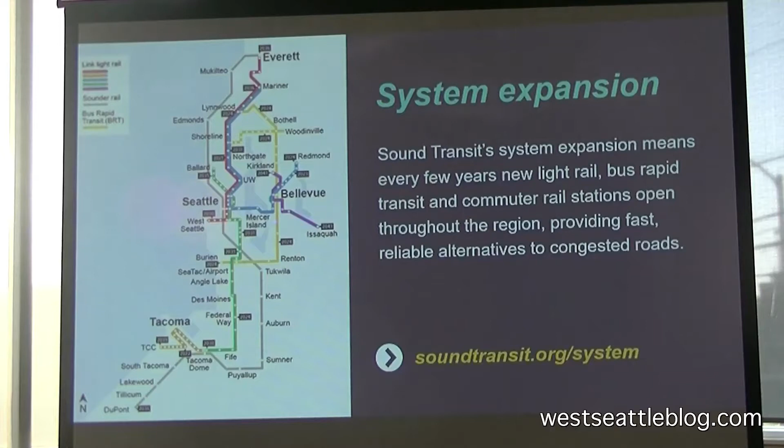It is part of a broader system expansion that was approved by voters in November of 2016 that includes light rail, bus rapid transit, Sound Transit Express buses, and is expanding in all directions throughout the region, to the north, to the east, and to the south.

In the voter-approved plan called ST3, we had a representative project that was the West Seattle and Ballard Link extensions. What it did was identify the mode, which is light rail in this corridor, the general route, and the station locations that would be served by these light rail extensions.

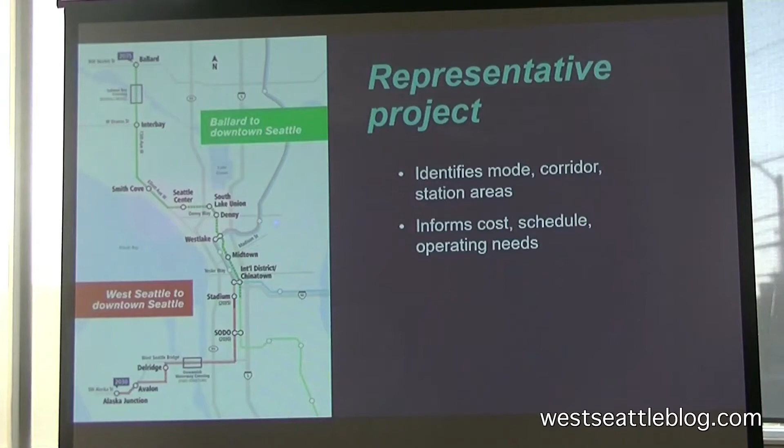This information really informed the cost estimates that were included in the plan brought to the voters. It also included milestones or schedule for each of the extensions, and information that would feed into the operations plan—how much fleet would be needed, where maintenance capacity would be needed as the system is built out over time.

So a little bit about the West Seattle Link extension, since I assume that's what most of you are here for. The West Seattle extension would extend from the Alaska Junction neighborhood to SoDo by 2030, and then ultimately continue along the line all the way to Lynnwood and Everett by the year 2042.

The initial extension we're talking about is from Alaska Junction to the stadium area, opening to SoDo in 2030, and then ultimately continuing beyond the stadium station in 2035.

So the stations included in the ST3 plan are at Alaska Junction, Avalon, and Delridge, plus an upgraded station at SoDo, and of course the stadium station down the road.

It also includes a new rail-only fixed span crossing of the Duwamish waterway. The representative project is shown on the south side of the West Seattle Bridge, and the overall length of this extension is about 4.7 miles.

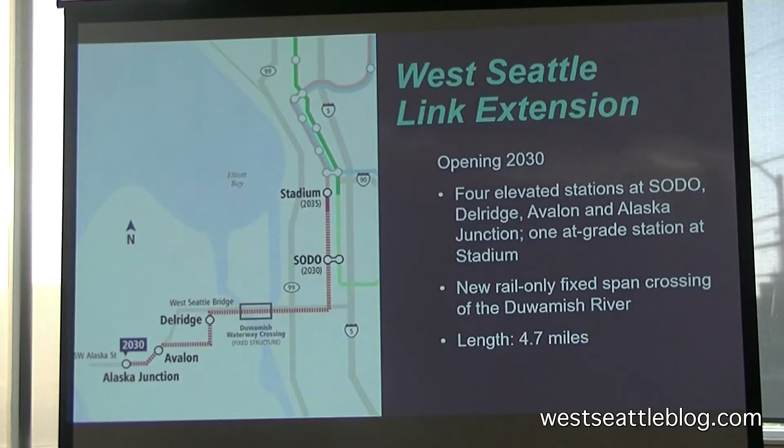So a little bit about the process we're in now. This is a lot of information—I'll step you through it. Some of you may have seen this before.

This is really a roadmap for our alternatives development process that began late in 2017 and is continuing all the way through April of next year, when we'll go to the Sound Transit Board for them to identify what we call a preferred alternative. We've divided this work into 3 levels.

So we're right now in what we call Level 1 alternative screening. We'll then move into Level 2 and Level 3.

Some of you may have been aware of the open houses we held about a month or so ago. This was during a period called early scoping, when we solicited input from the public and from everybody willing to comment on the project and the representative project—where the alternatives should go, what we should be considering as we determine the preferred alternative.

We're also reaching out in a number of different ways. We have neighborhood forums that we're holding now for the project. We've held 2 in the past week, and there's one upcoming—I'll just let the cat out of the bag—here in West Seattle, actually next Saturday. We're holding neighborhood forums throughout the process.

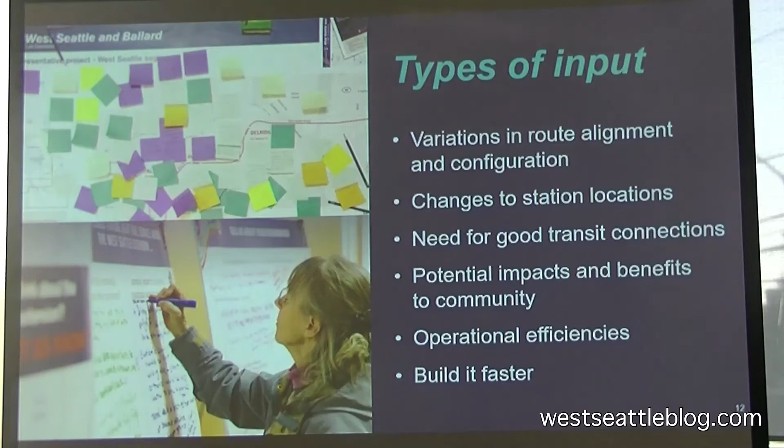Thank you very much. The types of input we heard: variation in route alignment and configuration, changes to station locations, the need for good transit connections including rail-to-rail and bus-to-rail, potential impacts and benefits to the community, operational efficiency, and of course, the one we heard - build it faster.

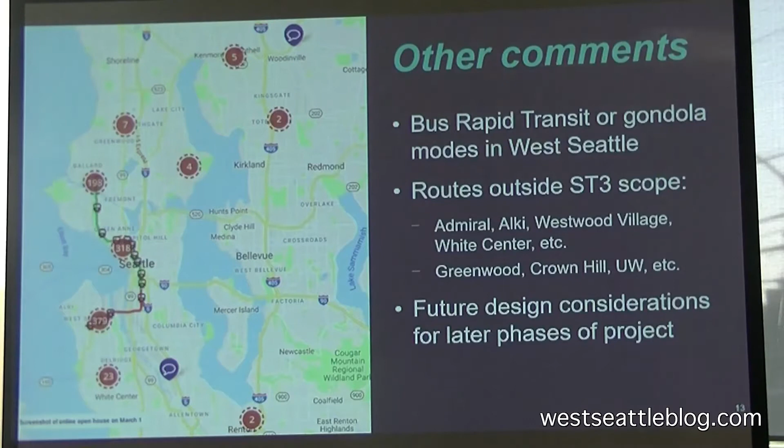Other comments we heard: bus rapid transit, gondola in West Seattle, routes outside Sound Transit 3 scope like going to Greenwood, Crown Hill, Alki, Admiral, White Center. We also heard some future design considerations we can focus on in later phases of the project.

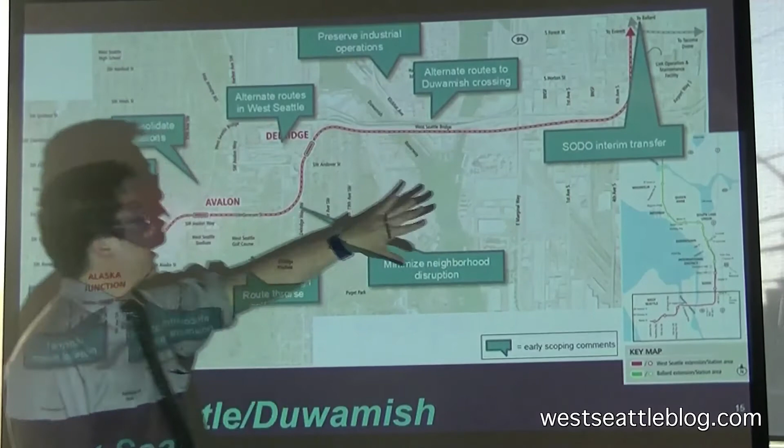Level 1 alternatives and evaluation is what I'm going to talk about next. What you see here is a map, downtown Seattle is up there, north is up. This is the Duwamish waterway, the SODO area here, Harbor Island over here, and this is where we're at, somewhere here I think. This is the West Seattle Peninsula. The blue bubbles you see here are the early scoping major theme comments we heard during the early scoping period in February and March.

That includes, starting from this side, the SODO interim transfer. What we heard is that in 2030, when light rail opens in West Seattle operating between Alaska Junction and SODO Station, requiring customers to transfer into the existing light rail to go downtown, the concern is that trains from Tacoma and SeaTac would be too full to get on. We heard that concern. Secondly, the SODO transfer also applies to the ultimate configuration in 2035.

Would that transfer be convenient to go to the airport? Let's say you transfer the train to the airport. It needs to be convenient.

We also heard different routing across the Duwamish river crossing, and different routing to get from Delridge to Alaska Junction. We heard the need to preserve industrial operations in the terminal and other industrial business here, and the need to minimize neighborhood disruption. There were also comments about consolidated stations, a tunnel in West Seattle, a route through the golf course, the station location at the junction, and the need to accommodate a future extension to the south to White Center and build for future Sound Transit projects.

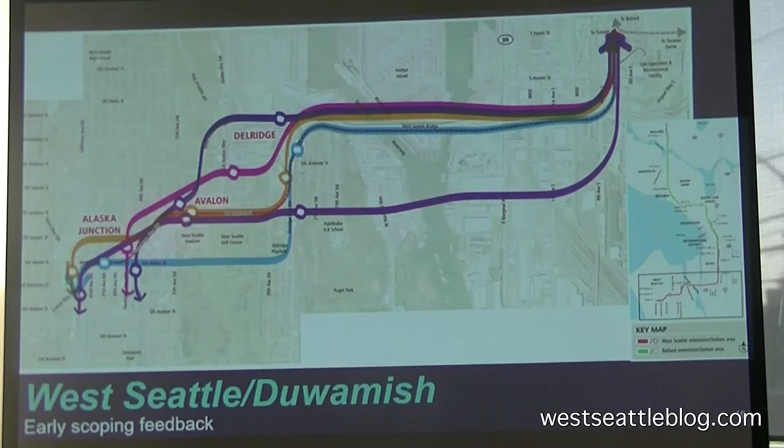So with all these early scoping comments, we bring out our crayons and try to draw and connect to see what we can study in Level 1. These are the alternatives we came up with, and since then we developed plan and profile so we can understand where the elevated guideway is, where the tunnel is, where the tunnel portal is as represented by the bracket, and also the station locations. I'm going to go through these one by one with you tonight.

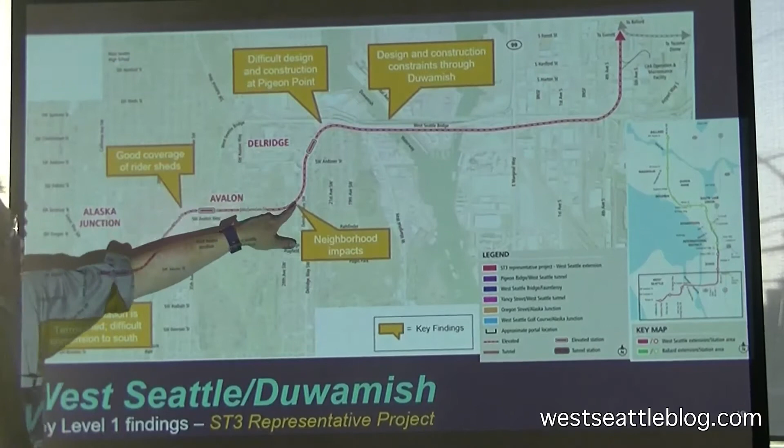Let's start first with the Sound Transit 3 representative project. Once again, it's a SODO Station departing elevated, crossing Spokane Street over the Spokane Street Bridge on the south side, crossing the Duwamish River in a high-level fixed-span bridge, arriving into a peninsula going through Pigeon Point elevated, with an elevated station in Delridge, elevated on Delridge southward, and making a turn westward on Genesee, elevated station at Avalon, and then using Fauntleroy as an elevated alignment getting into Alaska Junction with a tailgate at that point westward.

So the bubbles you see here are key findings we want to share with you. First, we've got some constraints through the design and construction through the Duwamish River - the space is very tight. It's difficult to design and construct at the Pigeon Point area because of the steep slope and risk for slide there. As the alignment turns from Delridge to Genesee, we also find there will be neighborhood impacts. However, the three stations are evenly spaced together, giving us a very good rider shed. Finally, the terminal station is constrained - as you know, Alaska Street has buildings on both sides, so it's constrained and very difficult to extend to the south.

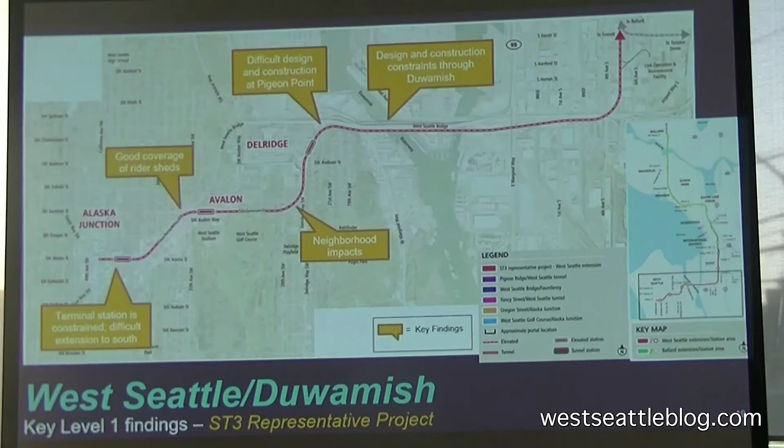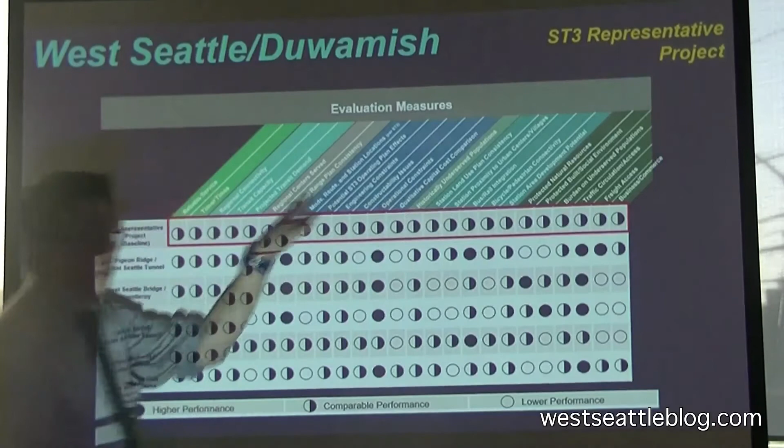As part of this, here's how we try to summarize our evaluation. We have the evaluation measures on top - there are 25 of them. We put the Sound Transit 3 representative project as comparative, so as we go through each alignment we can see whether it performs better or lower compared to the Sound Transit 3 project. I'm going to highlight some of these for you as we go through the presentation tonight.

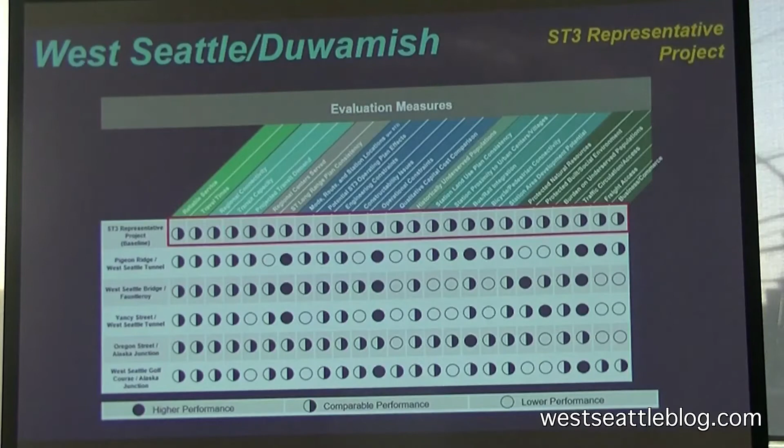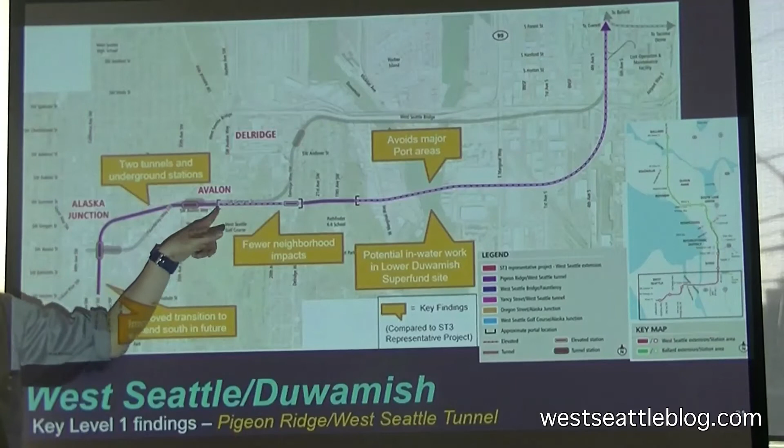So the first alternative, the first Level 1 alternative, is the purple line here. This is called the Pigeon Ridge West Seattle Tunnel Alternative. Again, departing SODO Station in an elevated station, elevated guideway, crossing Spokane Street, but this time we go further south and sweep westward, crossing the Duwamish River without touching Harbor Island. It then gets into a tunnel underneath the ridge of the Pigeon Point neighborhood. As the guideway comes out, there's an elevated station straddling the Delridge and Genesee intersection, with an elevated guideway on the north side of the golf course, entering another tunnel, with an underground station in Avalon, continuing tunneling, and having a north-south station in the vicinity of 42nd Street.

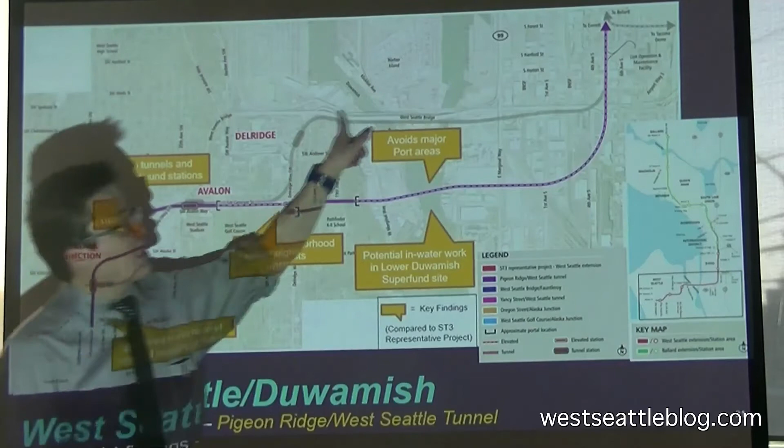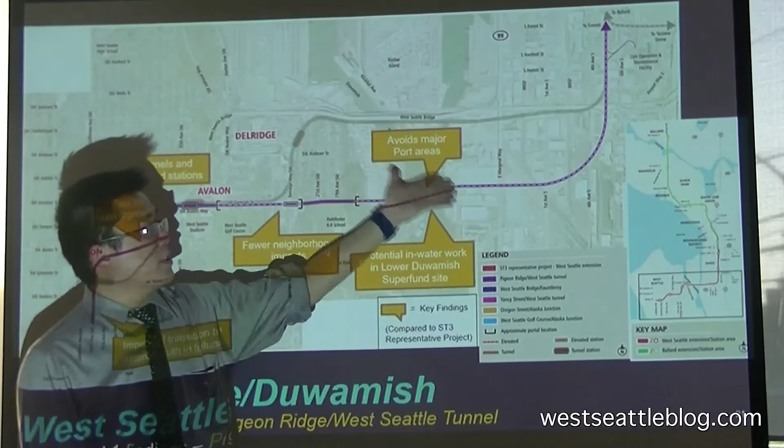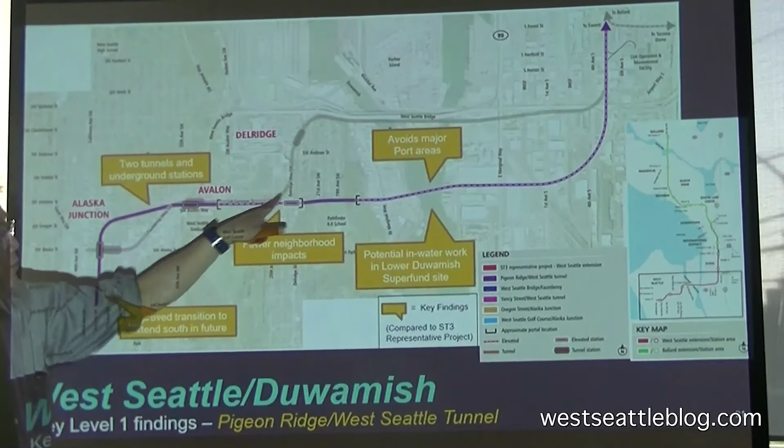The gray line you see here is the Sound Transit 3 representative alignment for comparison. Some key findings compared to the Sound Transit 3 representative project: it doesn't touch Harbor Island, so it avoids major port areas. However, because of the Superfund site in the lower Duwamish, there's potential in-water work there. There are fewer neighborhood impacts since we're not sweeping - we go straight across, and the tunnel helps with that. Also, we have two tunnels and two tunnel stations, and we have a north-south tunnel station which improves the transition to extend to the south in the future.

So how does it perform? Let's take a look at the second row, which is the Pigeon Ridge West Seattle Tunnel.

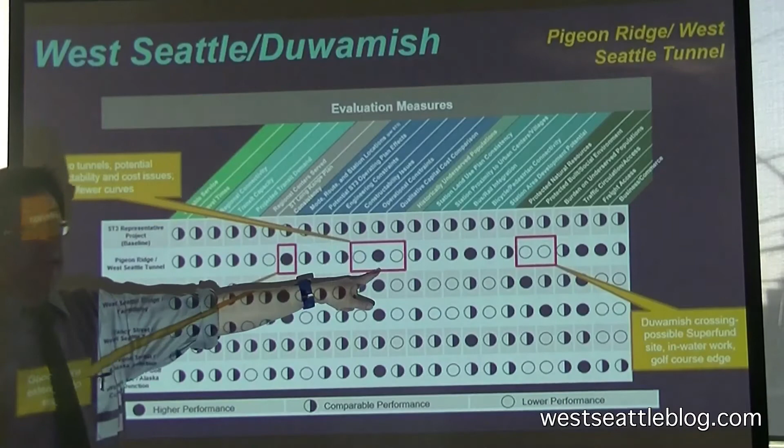It performs better under Sound Transit 3 Long Range Plan to extend to the south because it has a north-south orientation compared to the Sound Transit 3 representative alignment, which is east-west. It performs lower under constructability and cost because of the two tunnel stations and two tunnels. However, because it has fewer curves, it performs better under operational constraints.

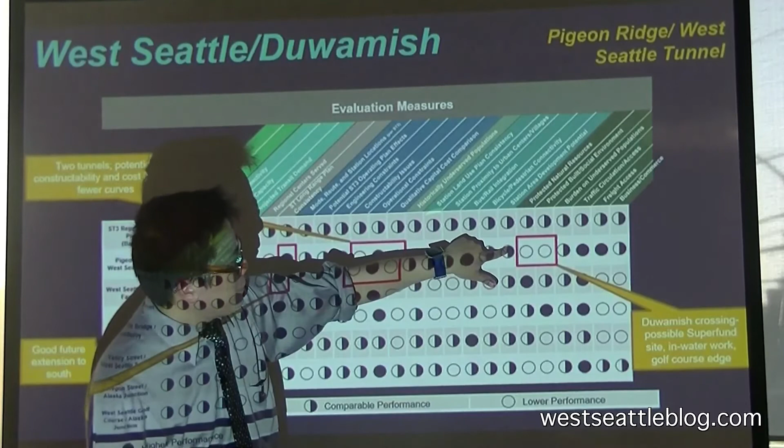It also performs lower compared to the ST3 representative project under protected natural resources and built social environment because of the Duwamish crossing, a possible Superfund site, in-water work, and the north edge of the golf course.

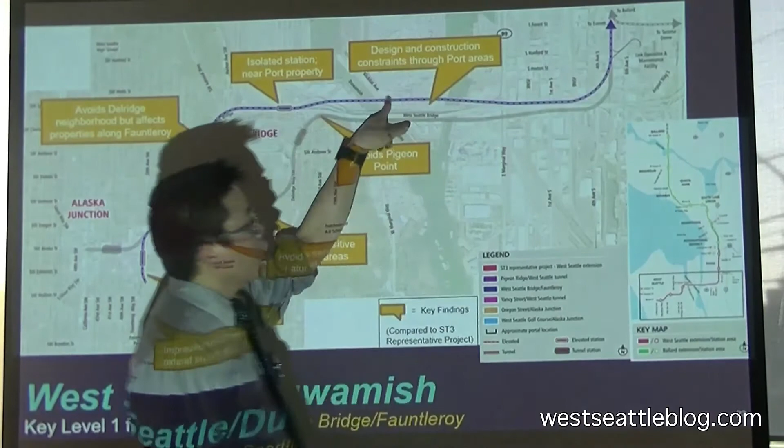The next alignment is the blue line, the West Seattle Bridge/Fauntleroy. It departs SODO Station, again elevated, but this time you don't cross the Spokane bridge. You continue on the north side of the West Seattle Bridge, crossing the Duwamish waterway with a high-level fixed-span bridge, arriving at the peninsula with an elevated Delridge station, sandwiched between Terminal 5, the West Seattle Freeway, and the new port site.

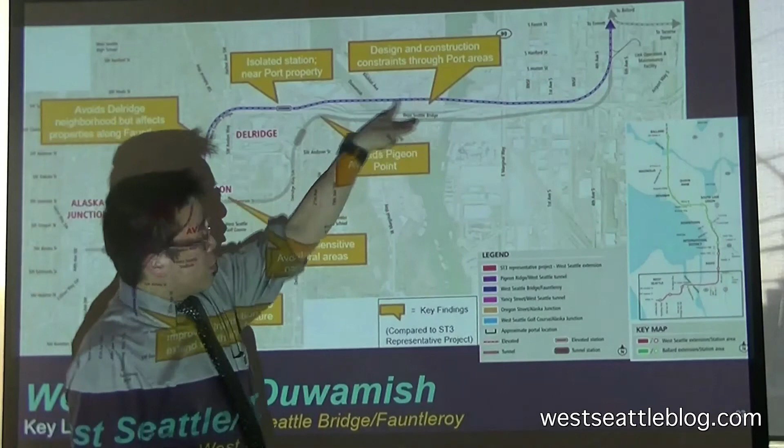Key findings: because it's on the north side of the bridge, it also has design and construction constraints through the port areas. However, this does avoid Pigeon Point, but it creates an isolated station near the port property, sandwiched between Terminal 5 and the port. It does avoid neighborhood impacts.

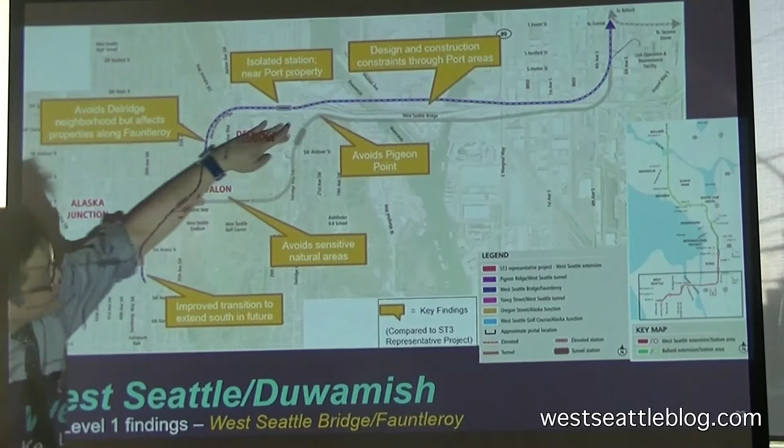It does avoid neighborhood impacts in the Delridge and Genesee corridor. However, it will affect properties along Fauntleroy Way Southwest. Finally, it improves the transition to extend to the south, and it also avoids a sensitive natural area, the Longfellow Creek that flows through there.

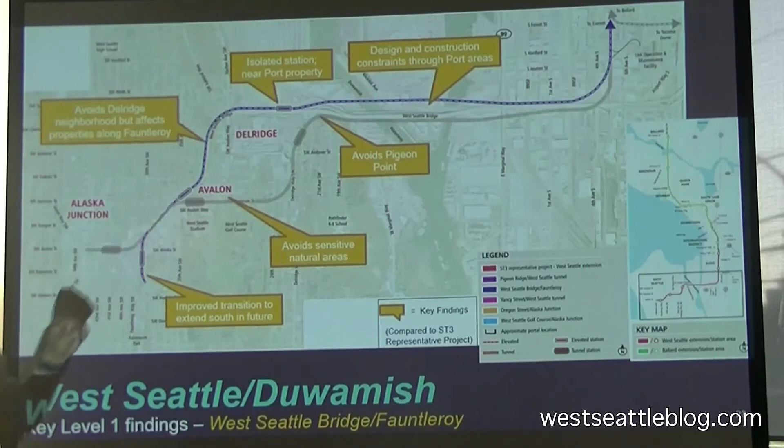How does it perform? We look at the third row here. Some highlights: because it's set up in a north-south orientation close to 35th Avenue Southwest, it provides a good future extension to the south.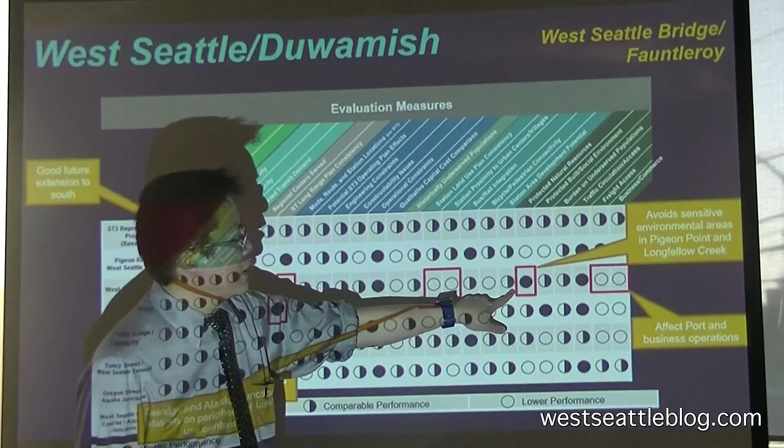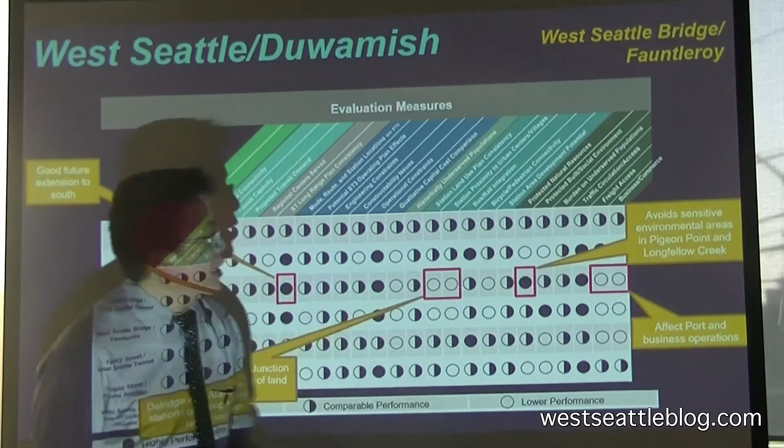Because of the Delridge and Alaska Junction station being on the periphery of the land use center, it performs lower under station land use plan consistency and proximity to urban centers. However, it does avoid the Longfellow Creek and Pigeon Point, so it performs better under protected natural resources. Due to being on the north side of the West Seattle Bridge and affecting port and business operations, it performs lower under freight access and business commerce measures.

The next alternative, the pink line: very similar to before, it departs SODO Station elevated, again on the north side of the West Seattle Bridge, high-level fixed span. But this time we're crossing over the Nucor steel plant and turning into an elevated at-grade partial tunnel station in the vicinity of Yancy and Avalon Way.

Then it enters a tunnel portal and goes underground into a north-south tunnel station in the vicinity of Fauntleroy Way Southwest.

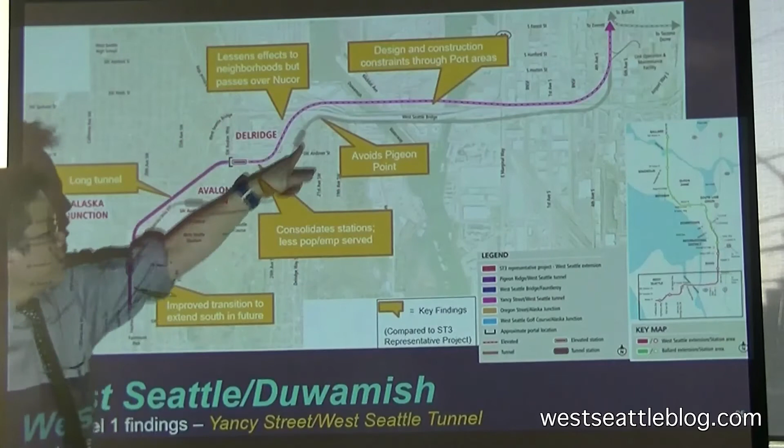Key findings: same design and construction constraints through the port areas. However, it does avoid Pigeon Point. It lessens neighborhood effects, but passes over Nucor. This consolidates the Avalon and Delridge stations into Yancy station, so we have less population and employment served with this alternative. It does have a long tunnel, but also a north-south station at the junction, which accommodates future extension to the south.

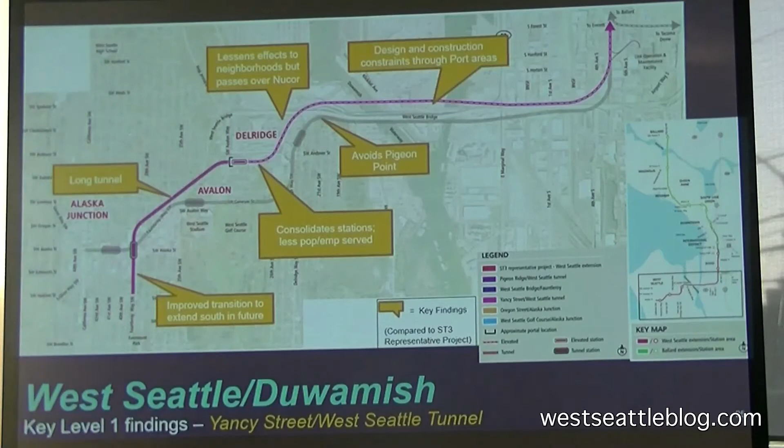How does it perform? We look at the fourth row here. First, because of the consolidated station and less population and employment served, it performs lower under projected transit demand and under station locations per the Sound Transit 3 plan that the voters approved.

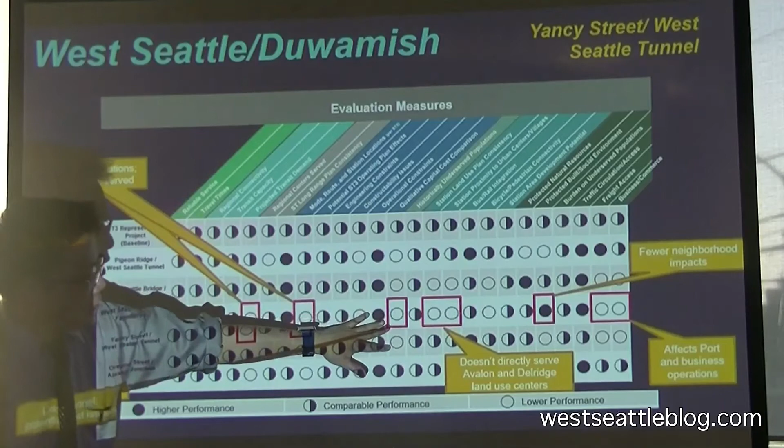It does have a long tunnel, so we have potential cost issues, and it performs lower under the cost measures. It doesn't directly serve the Avalon and Delridge land use center, so it performs low under land use plan consistency and proximity to urban center.

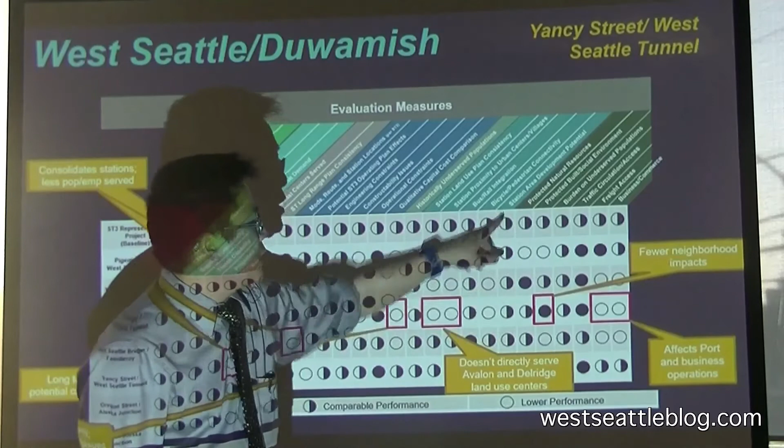However, it does have fewer neighborhood impacts, so it performs better under protected built social environment. And finally, because it's also on the north side of the West Seattle Bridge, it performs lower under freight access and business commerce measures.

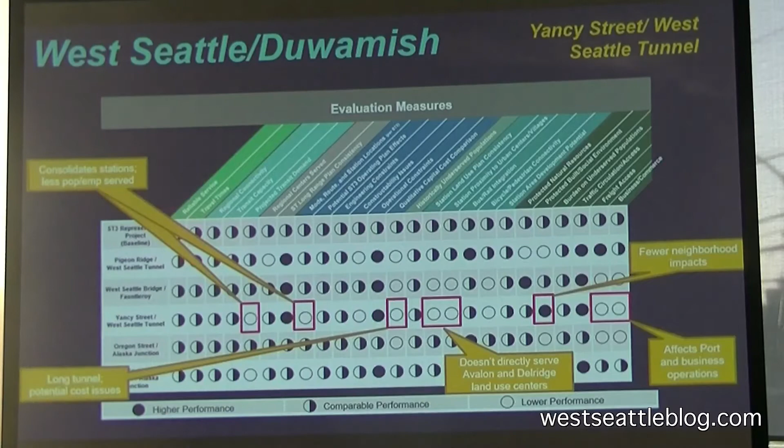Next alternative is the orange line, the Oregon Street, Alaska Junction option. This alignment, similar to the last two, departs SODO Station elevated, crossing on the north side of the West Seattle Bridge, again a fixed span, high-level bridge.

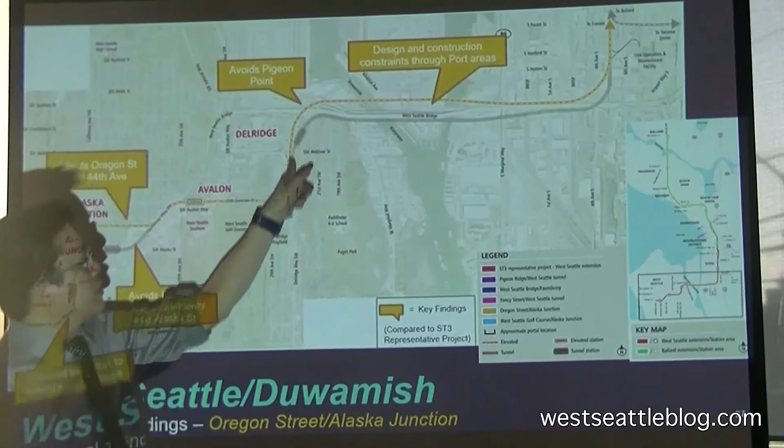After reaching the peninsula, it turns into the Delridge corridor with a station more south than the ST3 representative project. It then very much follows the Sound Transit 3 alignment, elevated guideway in Genesee, with an elevated station in Avalon. But this time, instead of using Fauntleroy and Alaska as a corridor, it uses Fauntleroy, Oregon, and 44th Avenue Southwest, with a station in north-south orientation near 44th Avenue, one block west of the junction intersection of California and Alaska.

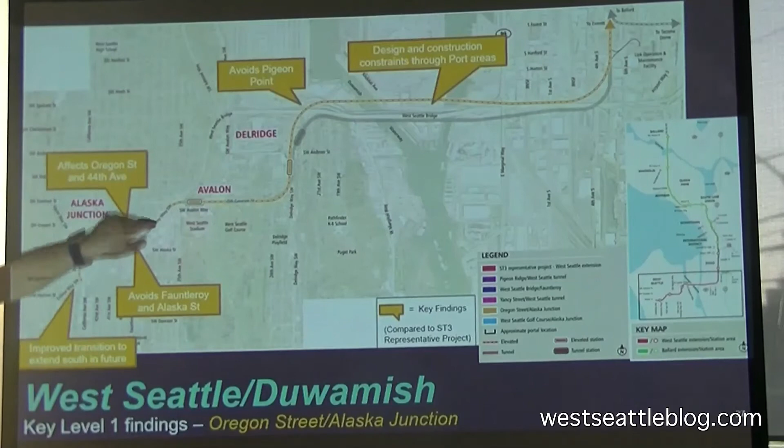Some key findings from the design construction constraints report: it avoids the Pigeon Point steep slope area, avoiding Fauntleroy and Alaska in this segment, but it does affect Fauntleroy, 44th and Oregon, and 44th here. It does provide a north-south orientation which facilitates future extension to the south.

How does it perform? Because it very much follows the Sound Transit 3 project, it performs comparably to the ST3 representative project. However, because of the junction station at 44th Avenue Southwest, which is in close proximity to existing bus layover, it performs better under bus-rail integration.

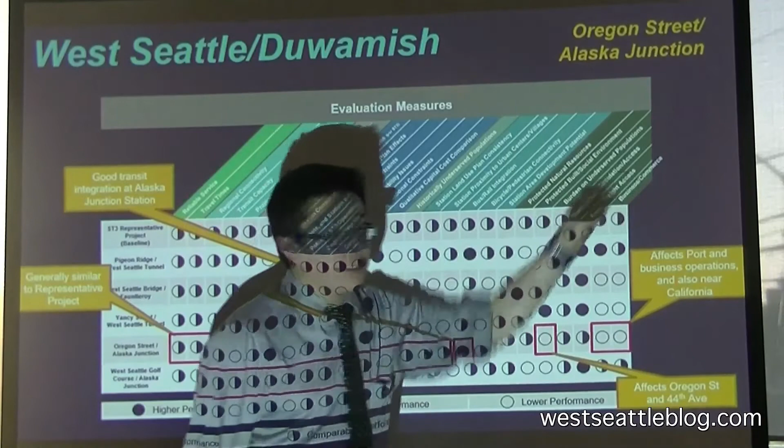Given that it affects Oregon and 44th, it performs lower under protected built social environment. And finally, because the crossing of the Duwamish is on the north side, and the elevated guideway is near California, it performs lower under freight access and business and commerce for these alternatives.

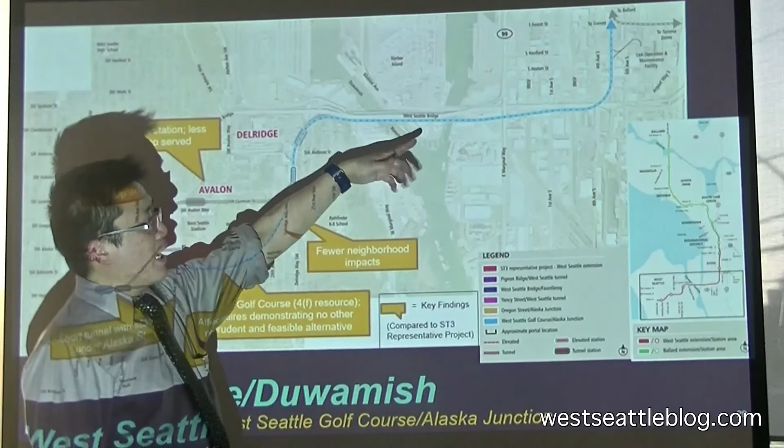And finally, the cyan line here is called the West Seattle Golf Course Alaska Junction alternative. Very similar to the Sound Transit 3 representative project, it departs SODO Station, elevated guideway on the south side. This time, also using the corridor for Delridge, with a station more south than the representative alignment.

Instead of using Genesee and Fauntleroy, this alternative uses the golf course, an elevated alignment through the golf course, getting into a tunnel portal, and having a tunnel underneath Alaska Street with a station in the vicinity of Fauntleroy and 42nd Avenue, and then a tail track that turns south.

Some key findings: because it's not turning on Genesee, we have fewer neighborhood impacts. However, it does affect the golf course, which is a 4F resource, requiring us to demonstrate no other prudent and feasible alternative. It eliminates the Avalon station, so we have less population and employment served. However, it does have a short tunnel with a station underneath Alaska Street.

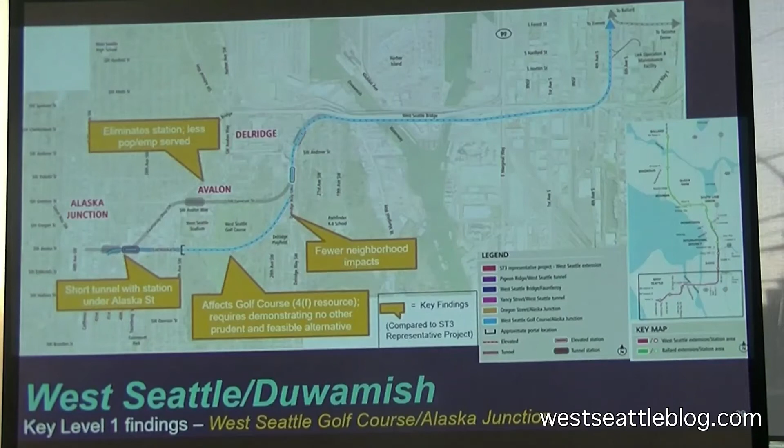How does it perform? It performs lower under projected transit demand because of eliminating the one station. It also performs lower under station proximity to urban center because it doesn't serve Avalon. It also affects the golf course, and finally, due to the golf course being a 4F resource, it performs lower under protected natural resources and protected built social environment.

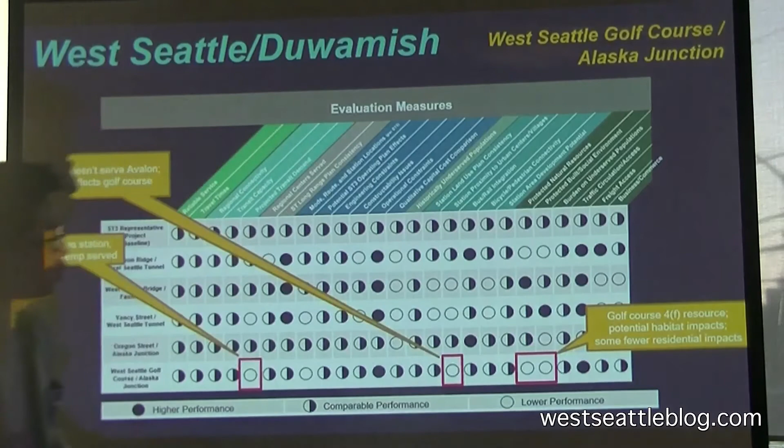Can I ask you something? The golf course is a protected resource? Yes, this is the slide that talks about that. Let me go through this slide.

Back in 1966, an act stipulates that United States Department of Transportation agencies such as the Federal Transit Administration, FTA, which is where we are under, cannot approve the use of land for publicly owned parks unless you demonstrate there's no feasible and prudent avoidance alternative, and that you've performed all possible planning to minimize harm to the property, or the administration, in this case FTA, determines that the use of the property will have de minimis impact, meaning the impact is so small it doesn't affect the use of the parkland. So Washington State DOT also operates under this Section 4F.

Did that answer your question? Yeah, unfortunately.

Could I ask you to clarify something under that act? Does it apply regardless of how the track transits the property, whether above ground or below ground? It does. So if it's below, is there a chance we could demonstrate an alternative? We can demonstrate it, we can do more study. Although you probably can't tunnel under the golf course and still get up to West Seattle, because trains can only climb at about a 7% grade, so geometrically it doesn't really work.

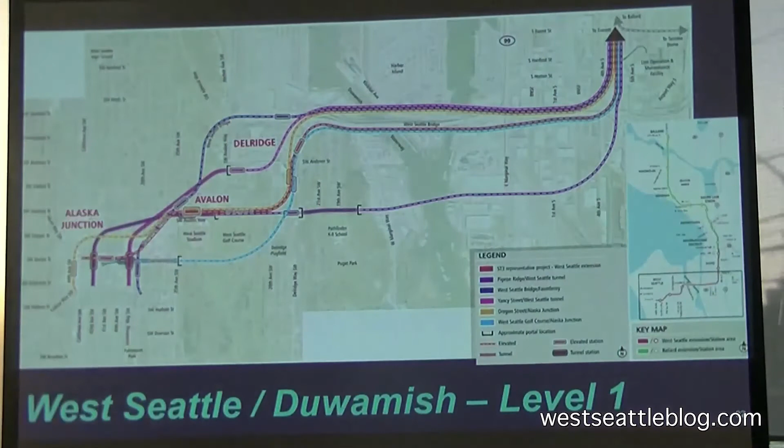This is everything together in one slide. I want to share some observations from reading the charts vertically. First, under cost: a lot of the alternatives perform lower because they cost more, mostly due to the tunnel and long span bridges. But for the golf course option, we find it very comparable to Sound Transit 3, mostly because of the public land involved, so it's a comparable cost.

Does this take into account the properties that you wouldn't have to acquire? Yes, that's why they're comparable.

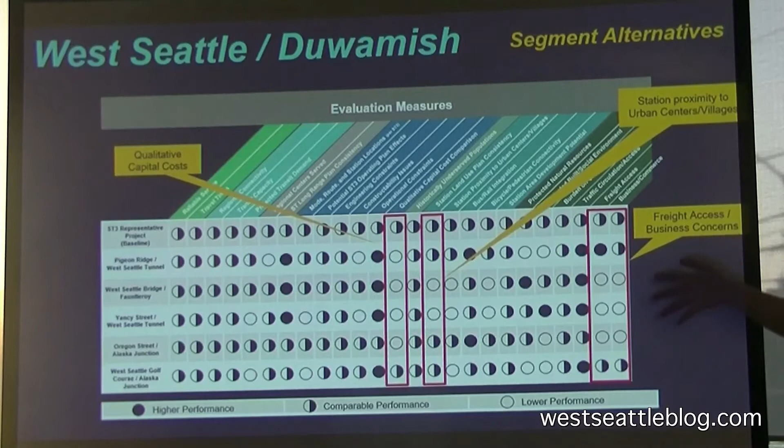Next is station land use. The Yancy Street station is outside the peripheral of the land use center, same with the isolated Delridge station, so that's why it performs lower under station land use plan consistency. Finally, these three alternatives on the north side of the West Seattle Bridge go through the tunnel and port terminal, which is why they perform lower than the alternatives that go further south.

This is the summary slide. On top are the alternatives we find very comparable to the Sound Transit 3 project. Pigeon Ridge West Seattle is borderline—a big challenge because of the two tunnels, but it does lessen effects on the port, Delridge, and Junction neighborhoods. Yancy Street, mostly because of the two stations, is potentially not consistent with the Sound Transit plan and requires tunnels, so cost is another challenge, but it also lessens effects to Junction and Delridge. The golf course option's major challenge is Section 4(f), described earlier. It also eliminates a station, so it's potentially not consistent with the Sound Transit plan, but it lessens impact to Junction and Delridge, which is a plus.

We also heard some suggestions deemed not practical. That includes a tunnel underneath the Duwamish, which is impractical because of the tunnel depth and length needed to climb up. Putting light rail on the existing West Seattle Bridge is impractical because the existing structure isn't built to accommodate light rail, and construction would be a huge challenge. We also heard about a gondola and a rail-bus shared bridge, which aren't practical because the mode isn't consistent with the Sound Transit 3 plan that Sound Transit has approved. Finally, extension to Alki, Admiral, etc. is not included in the approved Sound Transit plan, nor in the long-range plan.

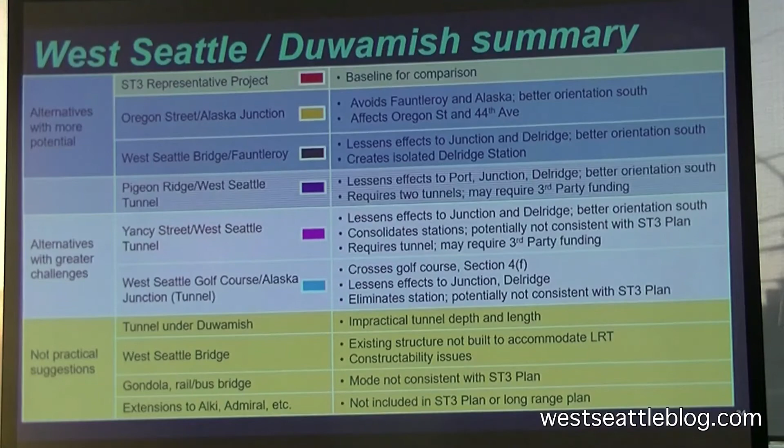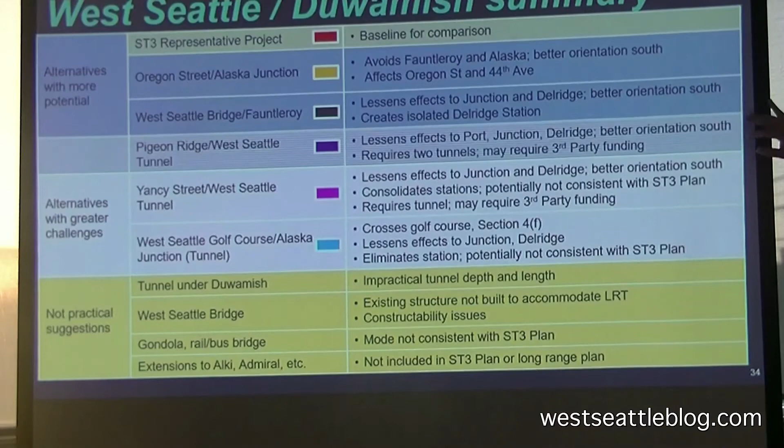Two days ago, I wanted to share a quick summary of the recommendation from the stakeholder advisory group. The question posed to them was which alternatives to carry forward and which not to carry forward. Those under the not-practical suggestions were decided not to be carried forward. The Yancy Street and golf course options are also in the not-carry-forward category. Pigeon Ridge was recommended to carry forward to the next level. West Seattle Bridge Fauntleroy was recommended not to carry forward to the next level. Oregon Street was recommended to carry forward to the next level.

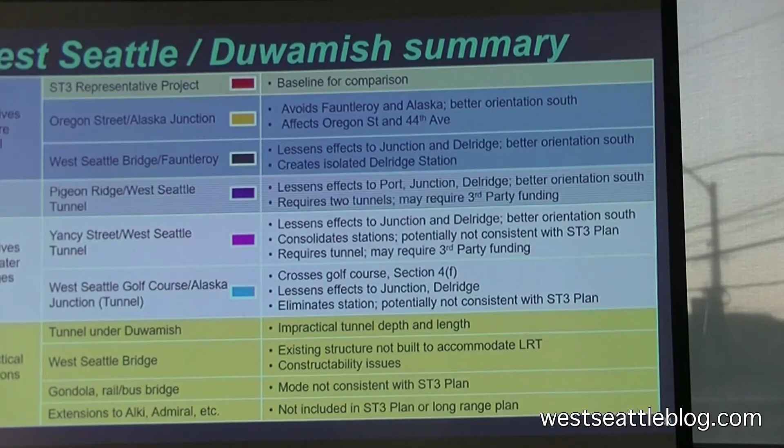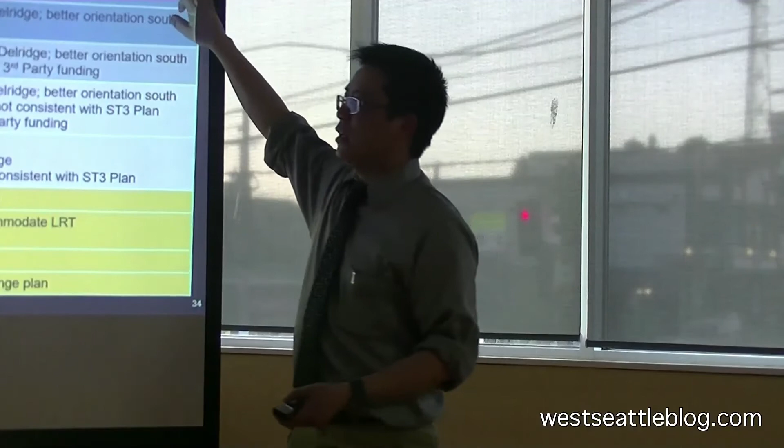Besides carry-forward or not-carry-forward decisions, we're also taking notes on refinements and are in the process of collecting those. At this time I don't have a clear idea of what refinements the stakeholder advisory group is recommending—it could involve some mixing and matching. One thing I heard clearly is the need to look at the Oregon Street Alaska Junction alignment, but in a tunnel through the junction. We're collecting these notes, and we hope to combine them with input from the elected leadership group, the neighborhood forum, and the Sound Transit board briefing to finalize which alternatives move to the next level.